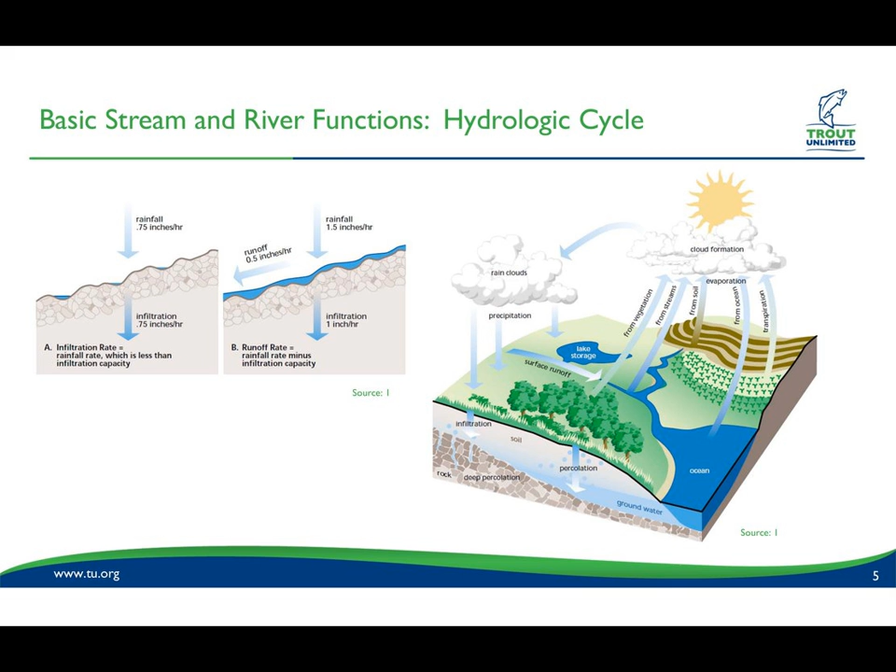The water will be conveyed to our larger lakes and oceans, and then through various forms of evaporation, water vapor will make its way up into the air, form clouds, and given the right conditions, we'll have more precipitation. Regarding infiltration, any water that's infiltrated into the soil will either make its way into the shallow ground and probably replenish shallow groundwater sources or percolate deeper into the deep aquifers.

So streams and rivers have a number of functions and purposes. Basically, they convey water, so the surface water runoff, subsurface flow, and any groundwater that makes its way into a channel. All that water is conveyed through streams and rivers. They also convey sediment and help to facilitate the natural erosion process. They also convey wood, ice, and other matter that's produced within the watershed.

And they also do a good job of processing the organic matter produced in the watershed and breaking it down into soluble and insoluble and particulate forms of nutrients like phosphorus and nitrogen and others. And finally, they provide habitat for aquatic and food for riparian life.

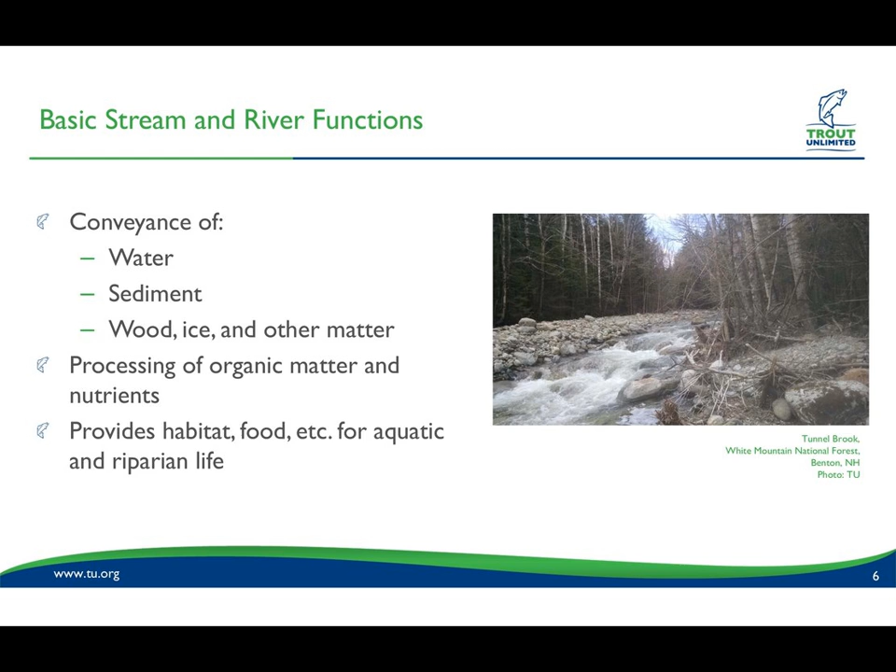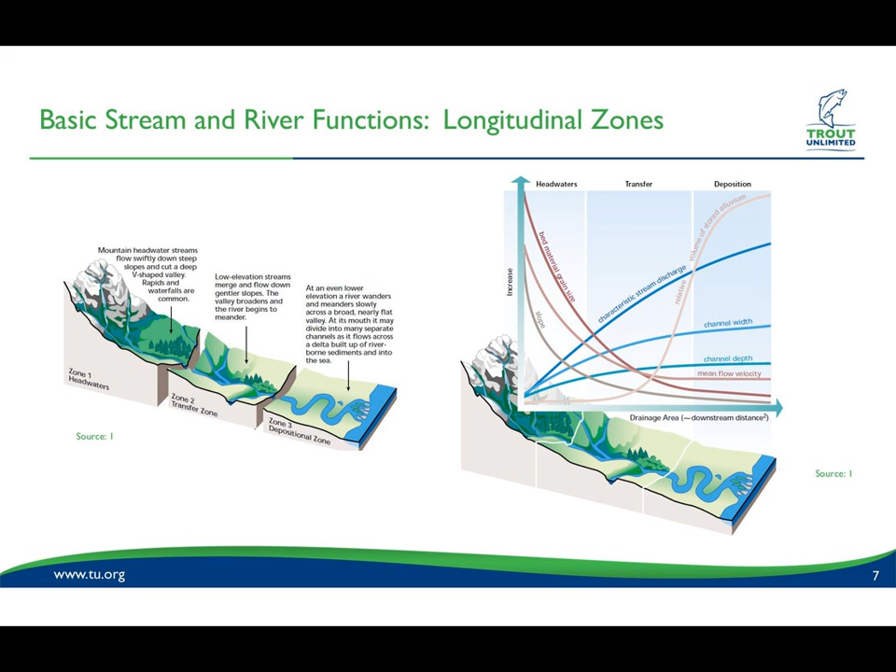Moving on to Zone 2, the transfer zone. This is where the slopes tend to drop off and become more mild. Likewise, the flow velocities tend to drop off and the valleys broaden. And the material that's coming from upstream could be deposited here, but usually is transferred through this zone into Zone 3, where the valleys and the floodplains really open up. The slopes drop considerably, so does velocity, and all that material from Zone 1 just settles out in Zone 3. And because you're at the end of the watershed, your stream discharge is probably at its maximum. Because of that, the channel width and depth increase as well.

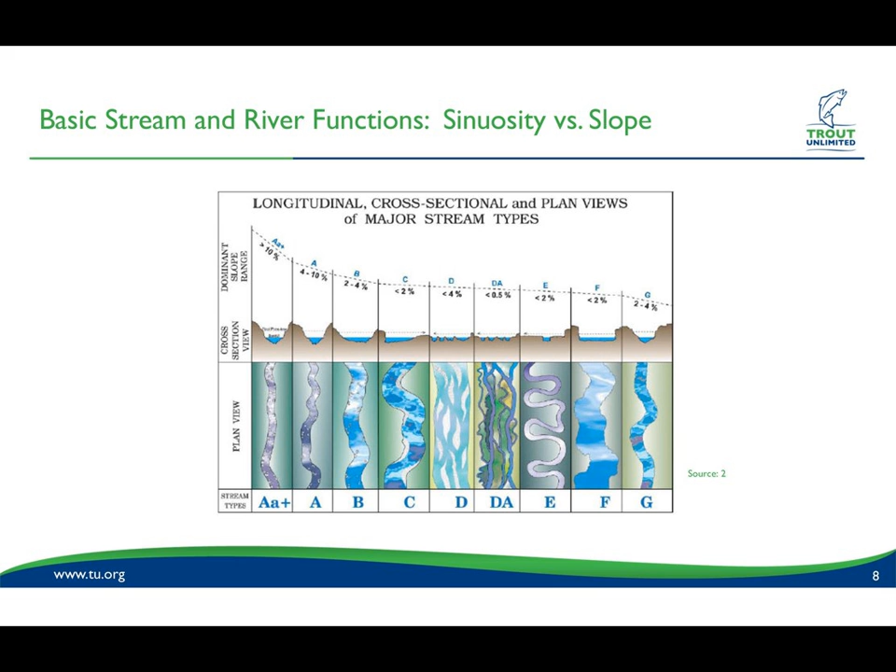Conversely, if you move over to a stream type E, the third in from the right side, you can see that you have slopes less than 2%, and you have much more sinuosity in a channel like that. Just a couple more items on sinuosity. So there's a couple things I want to relay with this slide, and the first one is that especially in Zone 3, streams and rivers rarely stay put. When you have higher sinuosity, you tend to see migration of the meander bends over time, and that migration can happen from upstream to downstream, and it also could occur from river left to river right.

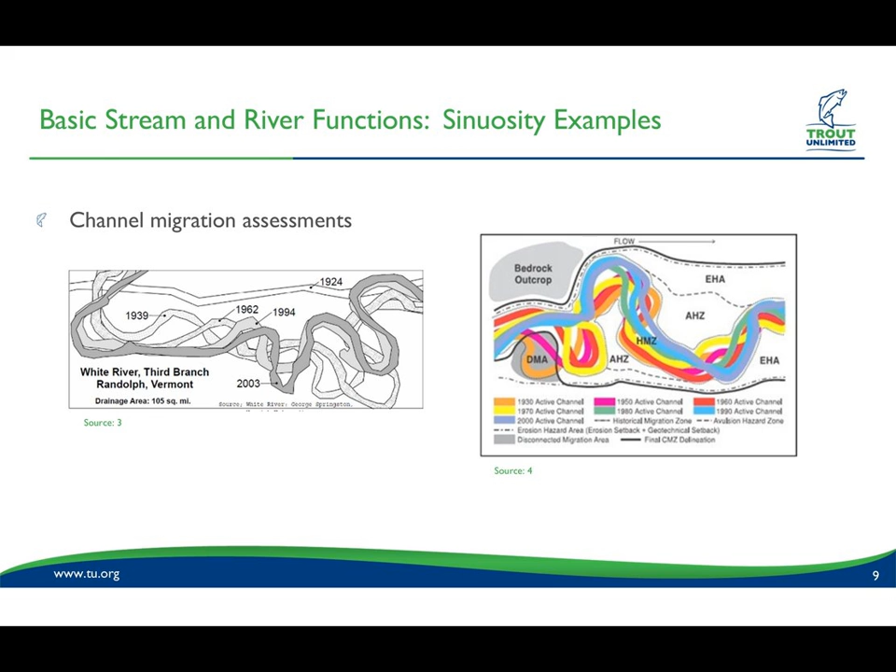is useful not only in planning for any kind of future development, but it could also be useful in assessing infrastructure vulnerability. For instance, and I know this to be the case for a lot of roads and infrastructure, if there's a highway built within the meander beltway and within the river corridor, that road could be subject to erosion if there is migration of meander bends towards the road embankment.

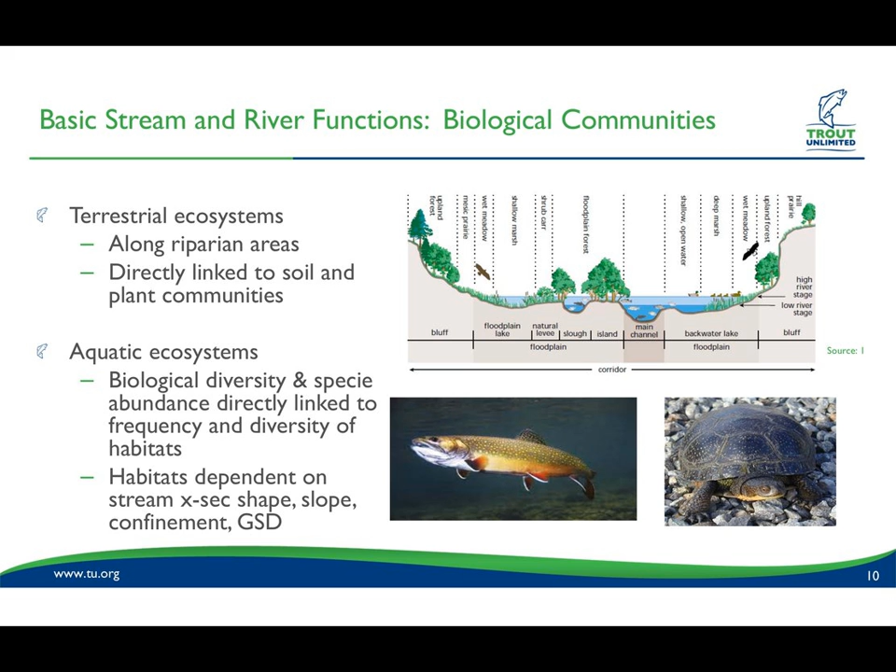But when we talk about biological communities, we talk about two types of ecosystems. One, a terrestrial ecosystem, which exists along the riparian area, and that is directly linked to the types of soils and the types of plant communities. And then we also talk about the aquatic ecosystem within the channel, where the biological diversity and species abundance is directly linked to frequency and diversity of habitat. When we talk about habitats in a river or a stream, we're talking about riffles, pools, and glides. And their existence and extent is dependent on the stream cross-section shape, slope, confinement, and also the grain size distribution of the bed material.

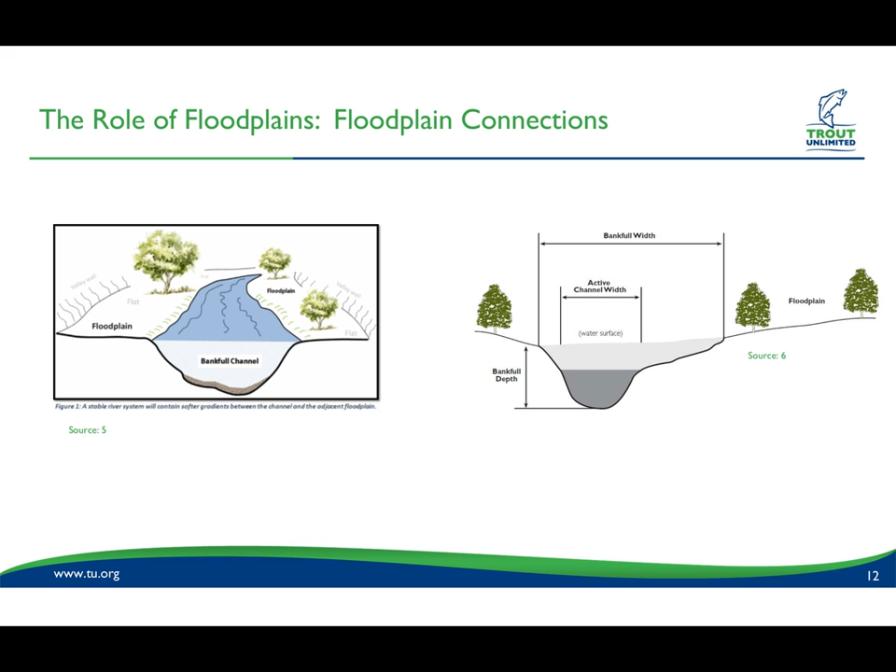So moving on to the role of floodplains and floodplain connections. So here we have two images that do a good job of showing the relationship between channel and floodplain. And this is a positive situation. Both of these show a good connection between the channel and its floodplain. And you can see on the image to the left, the flow is just up to the top of the bank. Any more flow in that channel, the flow would start to go over the top of the bank and then start to engage that floodplain. And that is typical of a channel that is well connected to its floodplain.

I would guess that a 1.5-year storm to 2-year storm would probably go over the top of banks and engage the floodplain. So this is a very healthy system. And one point I'd like to make is that when you have bankfull flow up to the top of bank, that's the point at which you have your highest velocity and highest shear occurring along the bottom of the channel and the banks of the channel.

As soon as you have more flow and the water surface elevation exceeds the top of bank, and you get flow into the floodplain, you get kind of what I call a flow release. You get a reduction in velocity, a reduction in shear stress, and that reduction is one of the benefits that floodplains provide. And I'll show you the opposite case in a couple slides.

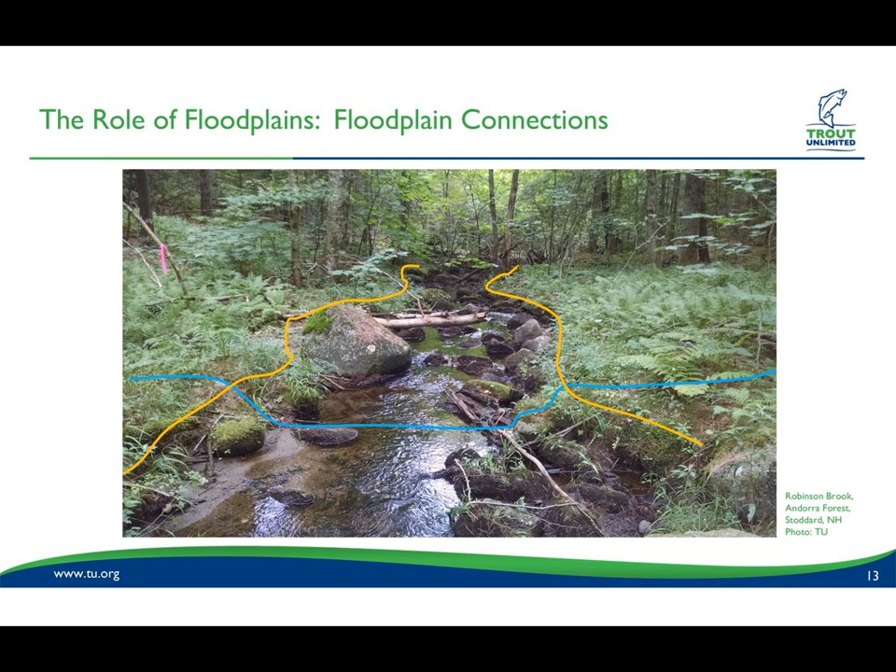We typically see improved water quality being one of the benefits of floodplains. If you have a floodplain that is forested and full of vegetation like grasses and bushes, that vegetation acts as a natural filter to filter out sediment and nutrients.

Once we have that velocity slow down on the floodplain and that water is just basically sitting on the floodplain soils, there's potential for recharging of the aquifers as that water sits there and infiltrates into the soil. And obviously we talked about that they host terrestrial and aquatic ecosystems, and they also provide for a number of recreational opportunities. So here we go.

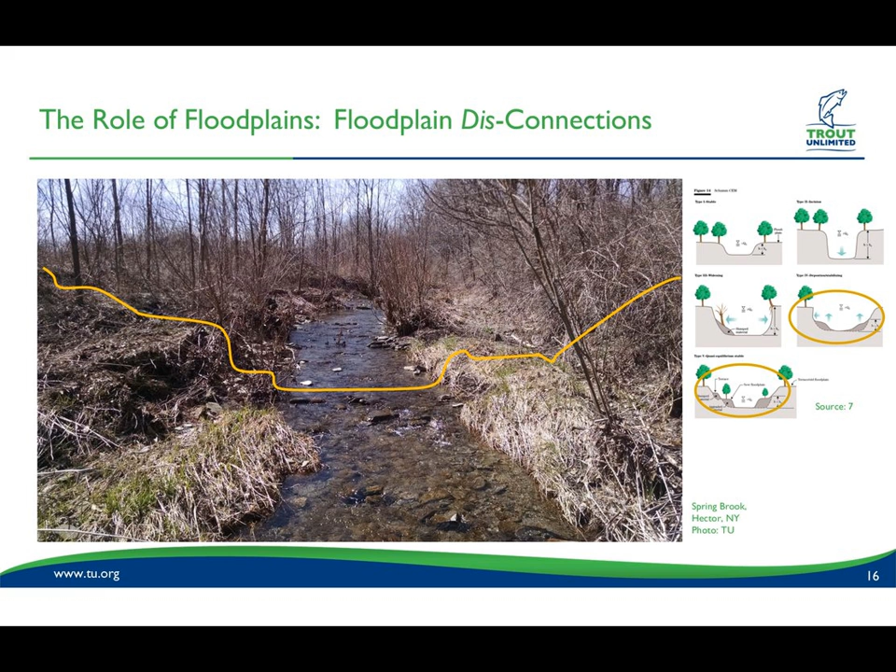And then what we're seeing out in the field is a good example of it progressing through this channel evolution model. Based on our field data and observations, we believe this reach to be in a type 4 or type 5. And you can see from my outline of the surface of the floodplains in the channel, there's evidence of this new kind of inset floodplain that this channel is slowly forming.

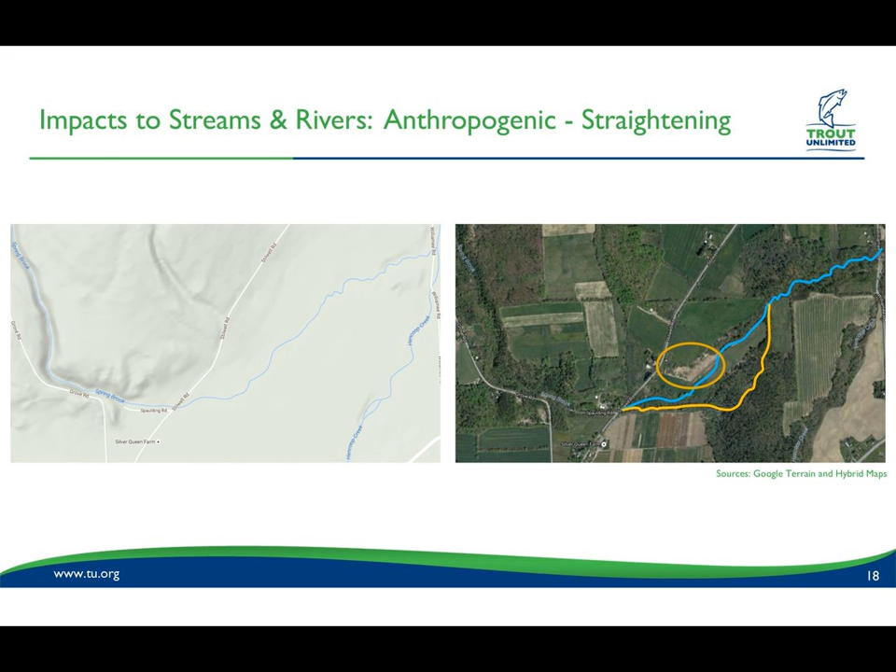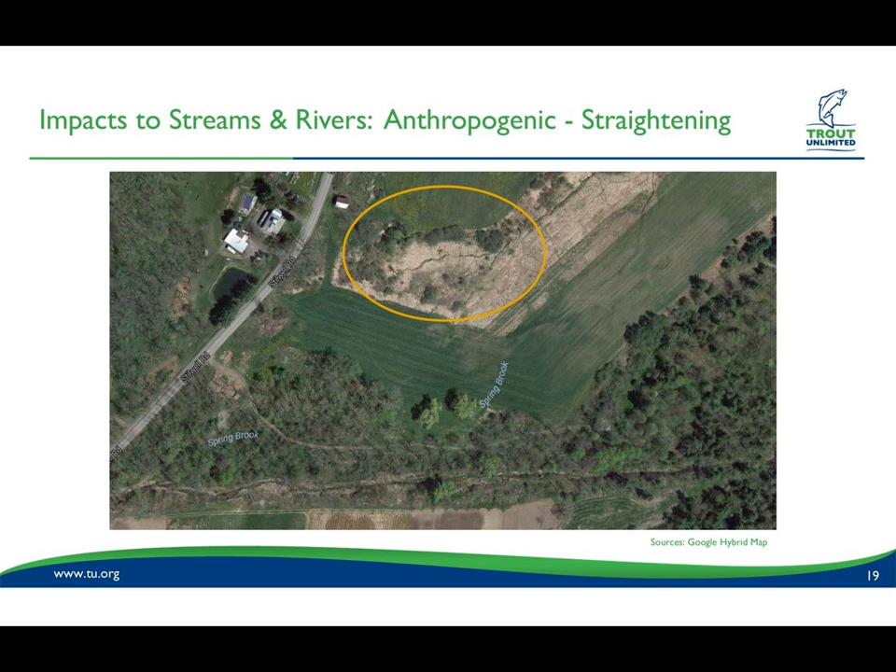What's also interesting is if we zoom into that orange oval that I have on that map, you can see the former channel running through that property. And you can also see the existing channel on the bottom of that image. And if you take a picture of that, this is what it looks like. This is the straightened channel looking downstream. And the impacts are significant.

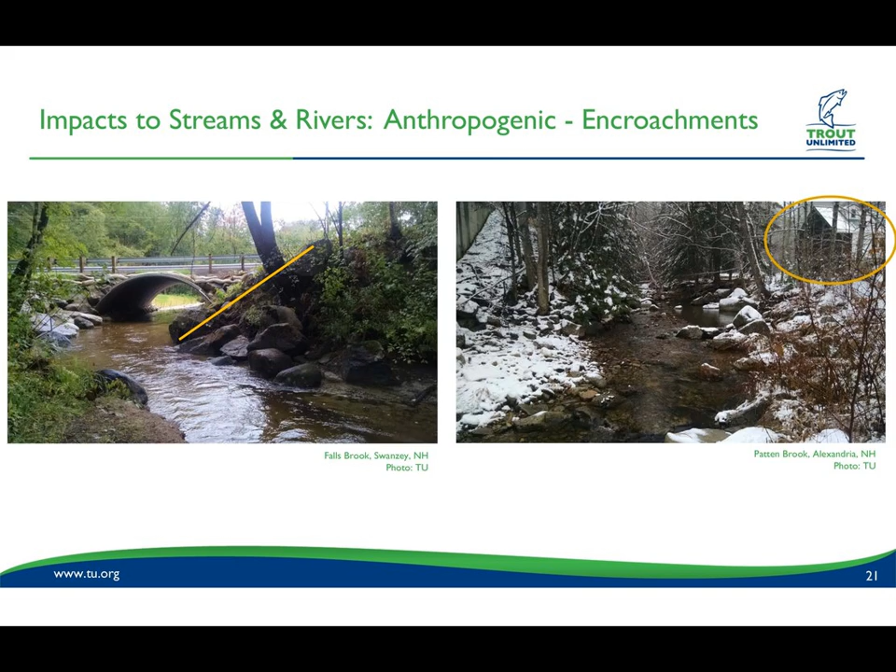And when you send that increase in stormwater runoff to a stream or a river, the stream is just going to adjust. It had a certain cross-sectional area, and it's going to widen or deepen or both, basically adjusting its cross-sectional area for that increase in flow. And that could take 50 years or 100 years to occur, and it could also be a steady source of sediment while that adjustment is occurring.

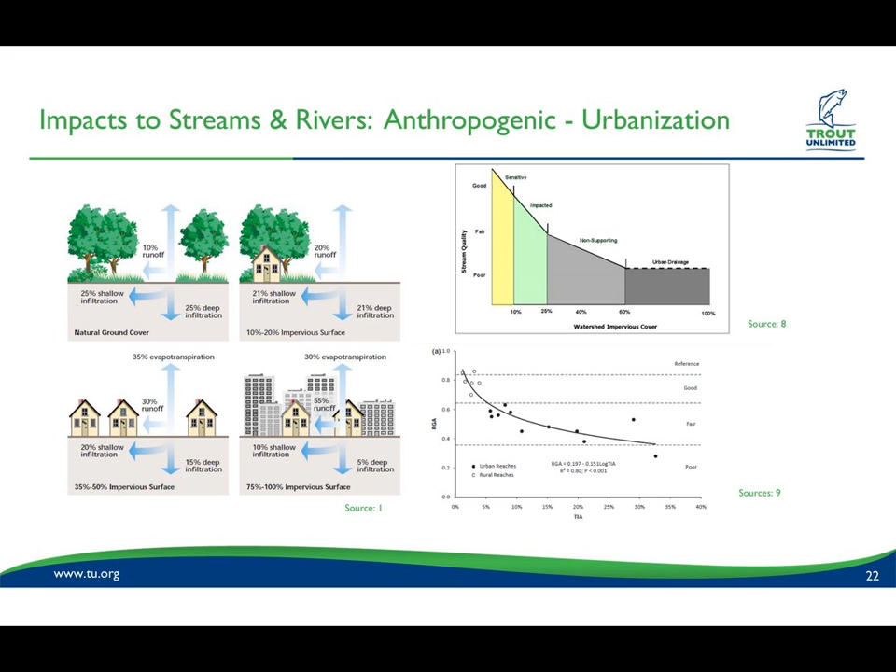And for high gradient reaches, what this graph tells us is that there's a pretty precipitous drop in stream quality as impervious area increases. And to note is that really the inflection of that curve could really be interpreted at 5%. So less than 10%. But either way, anywhere from 5 to 10% could be a point at which the scales start to tip and our streams and rivers are negatively impacted.

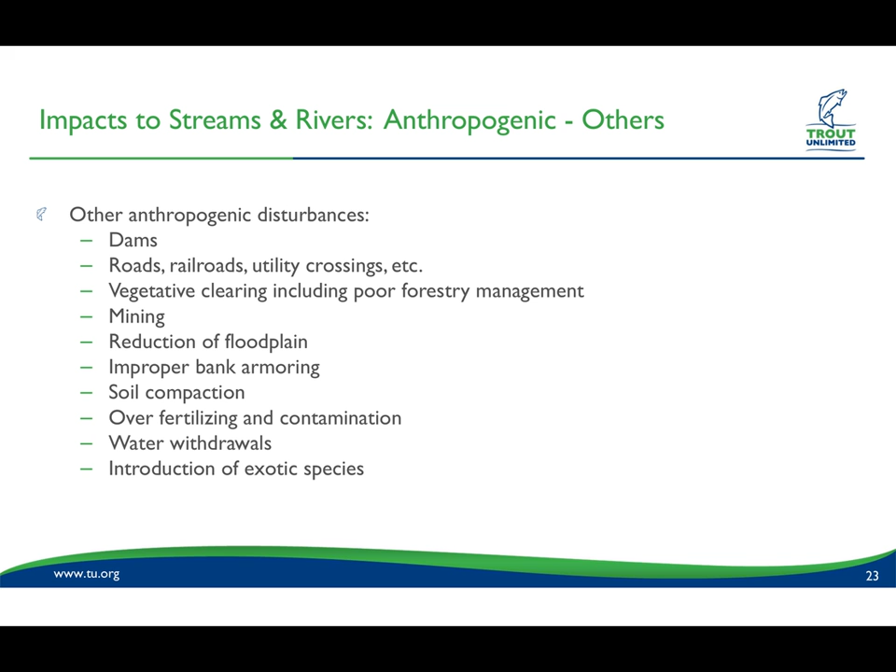We have some other anthropogenic-related impacts to streams that I'm listing here. Obviously, dams are really at the top of the list. Any type of road crossing or railroad crossing or utility crossing is an impact, and we have others that are high impact as well.

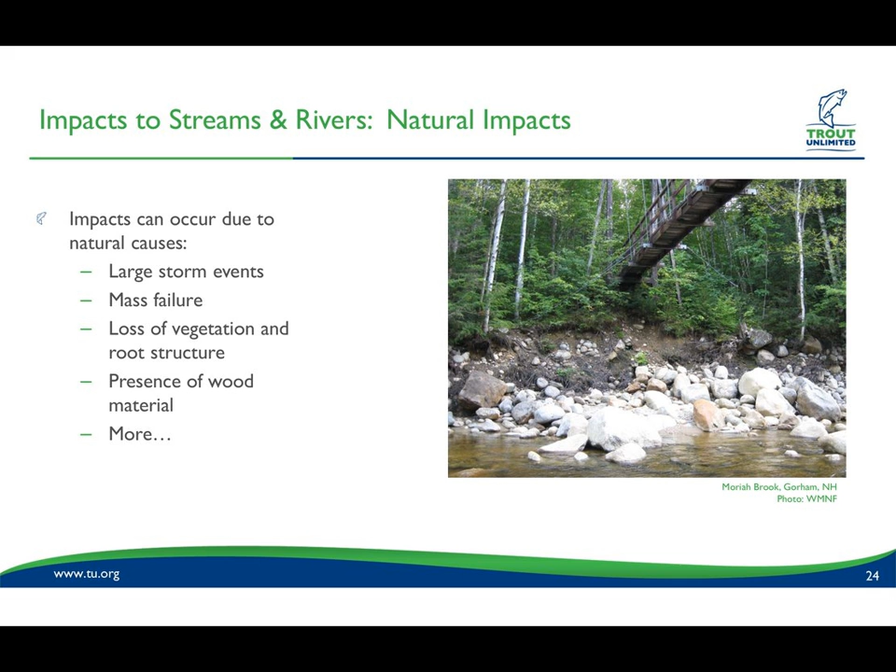There are natural impacts to streams and rivers. A lot of those are related to large storm events, high flow, and high shear stresses. The example that we're looking at to the right is kind of a mass failure along a bank in a pretty large brook in a pretty wild system on the White Mountain National Forest in New Hampshire. I believe this was caused by a large storm event, high flows, high shear forces, and eventually a mass failure along this bank.

So we talked about basic stream and river functions, the importance of floodplains, and then the impacts to streams and rivers from a number of different sources. So let's change gears and focus on infrastructure, and specifically infrastructure vulnerability. So at Trout Unlimited, and I don't mean to speak for them, but I think at U.S. Fish and Wildlife and the Forest Service, I know that we're really into streams and watershed and fish. And I know the question could be from some of you is why the focus on infrastructure and flood resiliency? Why are we focused on that?

Well, one thing that we know and what we've discussed over the last few minutes is that infrastructure often impacts rivers and streams. It has in the past, and it's happening right now. But the opposite occurs too. Rivers and streams impact infrastructure. I think maybe half of us on the call and who will be at the workshop will be very interested in the rivers portion, and maybe the other half might be interested in the infrastructure.

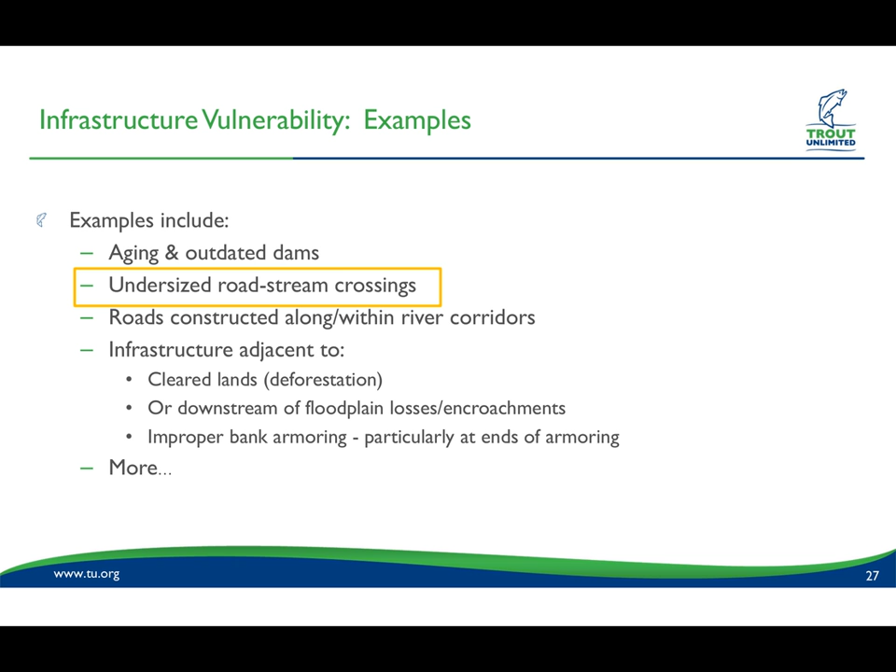Roads constructed along or within river corridors. I tried to touch on that previously. That's another one that's worth a look for the planners out there and anyone within a town that wants to assess those types of vulnerabilities. And then infrastructure adjacent to cleared lands or deforested lands, adjacent to or downstream of floodplain losses or encroachments, and improper bank armoring, and the list goes on.

So we don't have the time to go over more than one example, unfortunately, at least for this. We'll try to touch on other examples in the workshop. But for the remainder of this presentation, we're going to focus on undersized road stream crossings.

And so let's just imagine that this undersized culvert is at the bottom of a large watershed. The 100-year storm event has just occurred or is in the process of occurring, and there's a large volume of water heading down the mountain towards this undersized culvert. In its path, it's stirring up sediment, gravels, cobbles, maybe some boulders.

The majority of that material is entrained in the water column, and there's enough energy to keep that material in the water column. As that water moves down and feels the influence of that undersized culvert, all of a sudden that mass of water slows down. As it slows down, it gets backed up, and the water surface elevation starts to rise, or there's basically flooding behind this pipe.

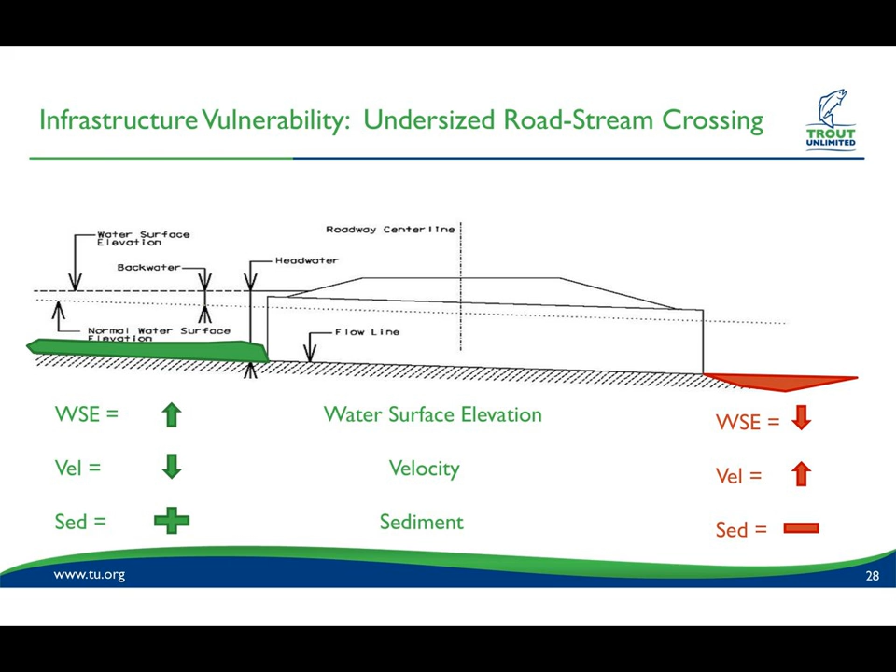Downstream, we usually have the opposite case. We usually have water surface elevations that are relatively lower compared to upstream. Because of the pressure upstream, we have a fire hose effect on the downstream end with really high velocities coming out of that pipe. And because of that, we have sediment erosion. And it's not just along the bed. In a lot of cases, it's around the entire pipe.

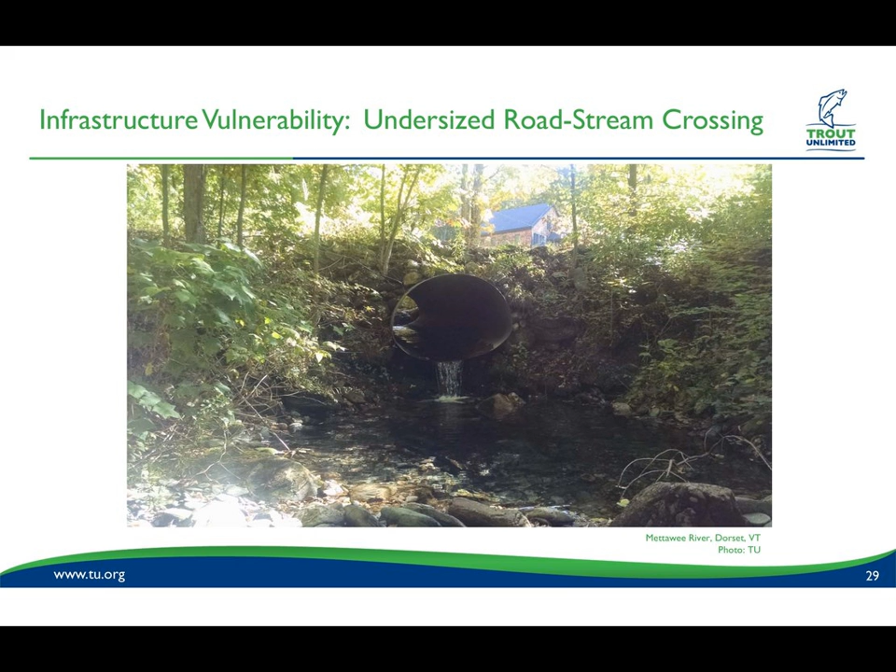So what we do in these situations, and what we and others in New Hampshire, Vermont, Maine, Massachusetts do, is culvert assessments. And I'm sure these are being done in Pennsylvania, New York, and New Jersey as well. But I'm going to walk you through a culvert assessment. This is one of our projects that I'll share.

And these crossings, there was information collected on these crossings, and they were assessed for geomorphic compatibility, aquatic organism passage, otherwise known as AOP, and then hydraulic capacity. So one of the first steps when we do one of these is we start in the office. We open up GIS and we bring in all the road layers, we bring in all the stream layers, and wherever those intersect, we assume that there's a road stream crossing.

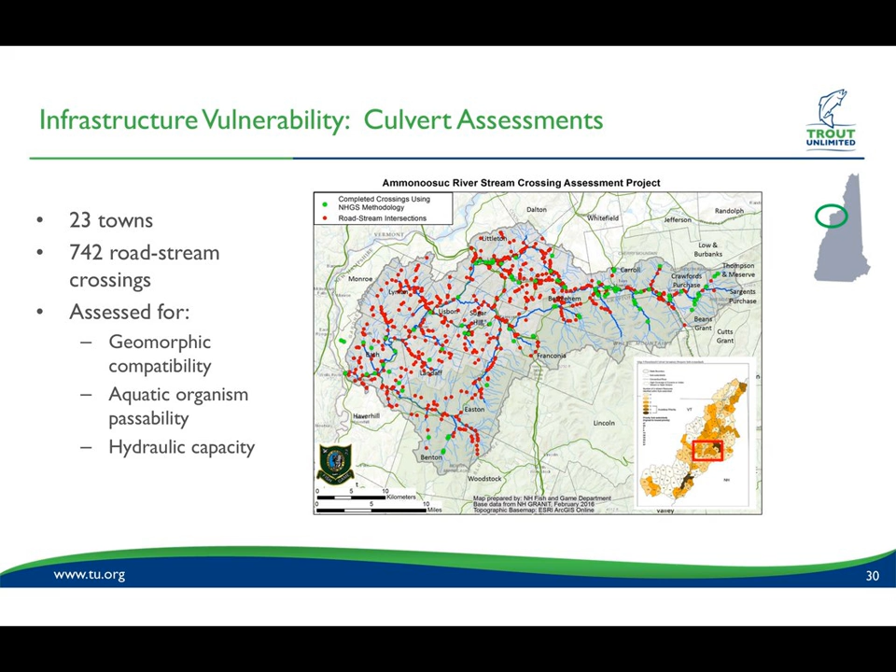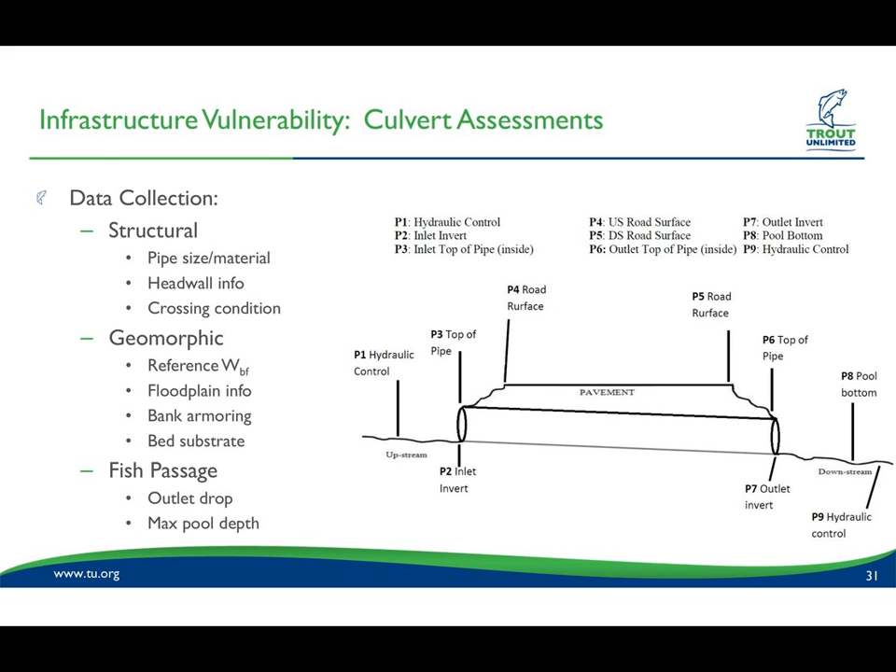So in terms of data that we collect, and this is just some of the data, but we collect structural data, geomorphic data, and then fish passage data to support the three different assessments that we go through. And we also collect survey data shown in the image to the right. And then we run that data through the aquatic organism passage and geomorphic compatibility models, and we get various results.

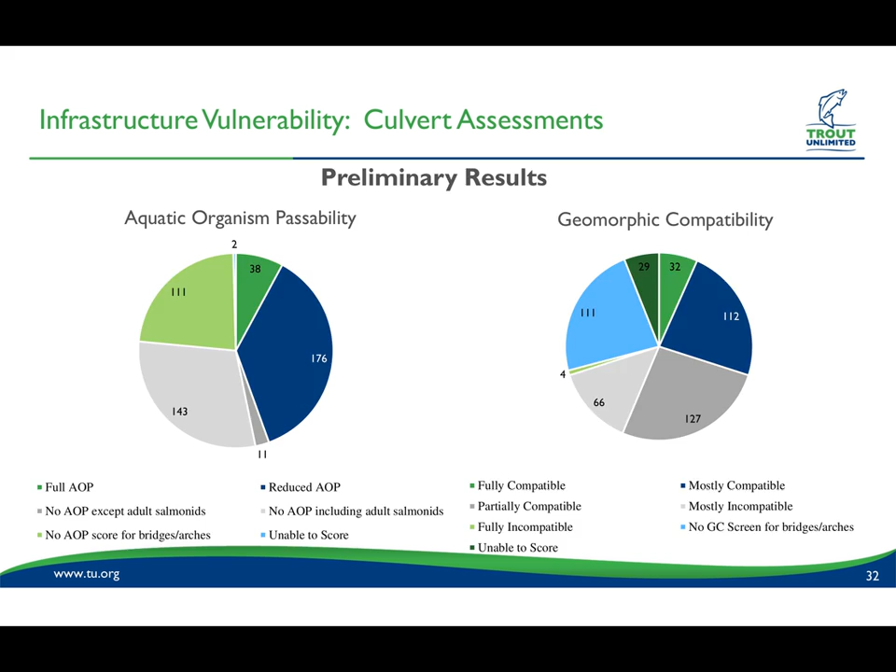For geomorphic compatibility to the right, again, we go through the full gamut here: fully compatible, partially compatible, and then incompatible or unable to score. So those are the basic models that existed, and we went ahead and created this culvert hydraulic assessment model. As you would think, this effort includes collection of a good amount of hydrology data. Basically, you have to collect hydrology data for each culvert, right? And that's primarily a GIS-based effort.

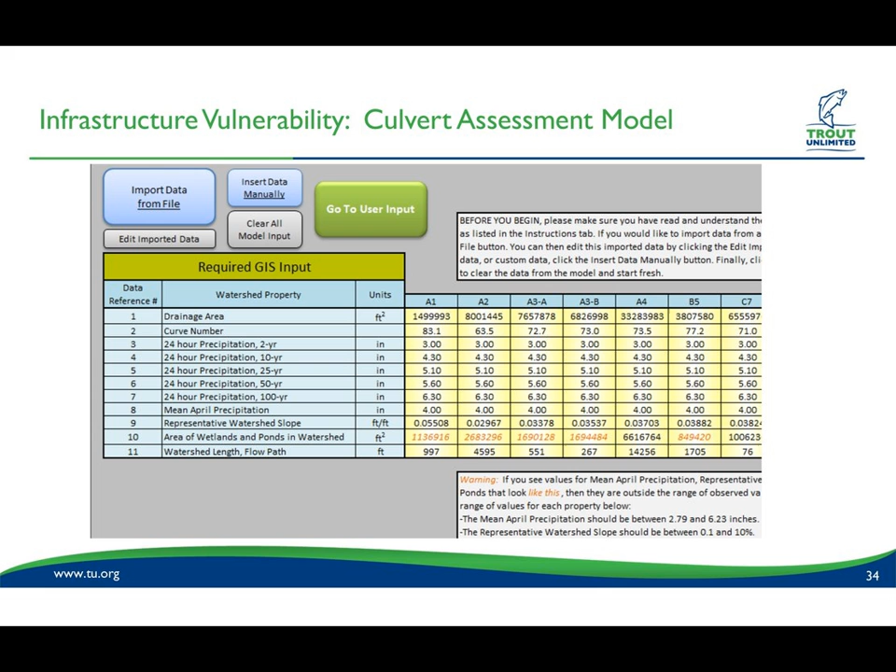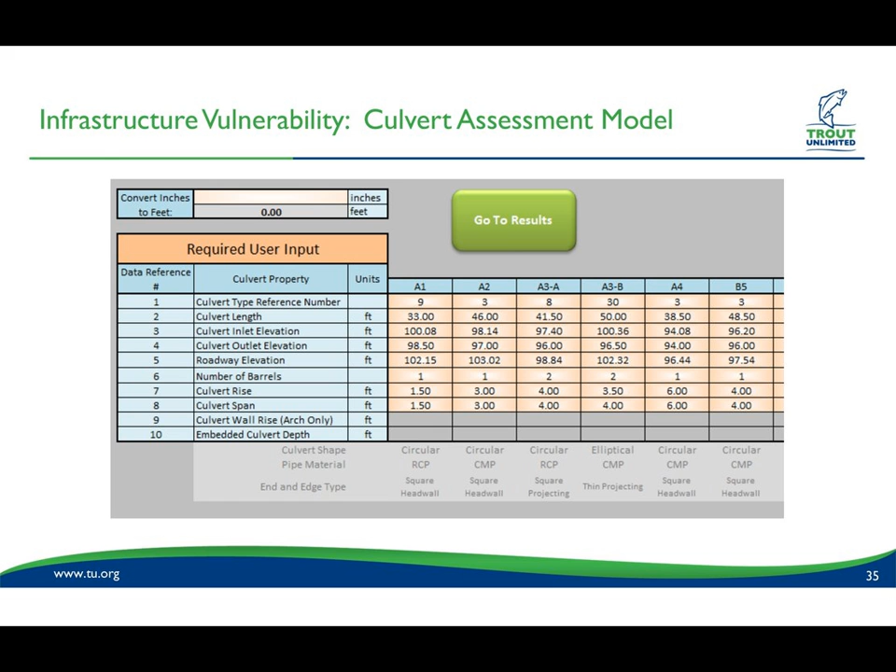We move on to the tab where you input the hydraulic data. Again, you have certain culvert properties. You have a reference number, a length, an inlet and outlet elevation, roadway elevation, a rise, a span, again, for all the different types of culverts. And once you have that information input in, then you go to the Results tab. If this was live, I would go ahead and select the return period. Here we have a 100-year return period.

And in the first section, looking at the text that's at a 90-degree angle, existing crossing properties. So you have all the existing properties for each culvert ID. Again, those are listed as LP_BOBK_02, and so on. And you can see that there are cells shaded red, green, or yellow. And those are the results, basically telling you, was this culvert able to pass the 100-year storm event, or was it not? So the basic way that this model is set up is that it uses what's called the headwater to depth ratio to assess whether it passes, is transitional, or fails.

So the headwater is basically the depth of water just upstream of the culvert, and the depth is the height of the culvert pipe. So if the height of the water upstream of the pipe was 0.8 feet and the culvert pipe was 1 foot high, you would have a headwater to depth ratio of 0.8. And the way we set up the pass or fail in this model was that if it had a headwater depth ratio greater than 0.8, it failed. If it was between 0.8 and 0.65, it was transitional, and if it was under 0.65, it passed. So that's how we set up the pass-fail mechanisms.

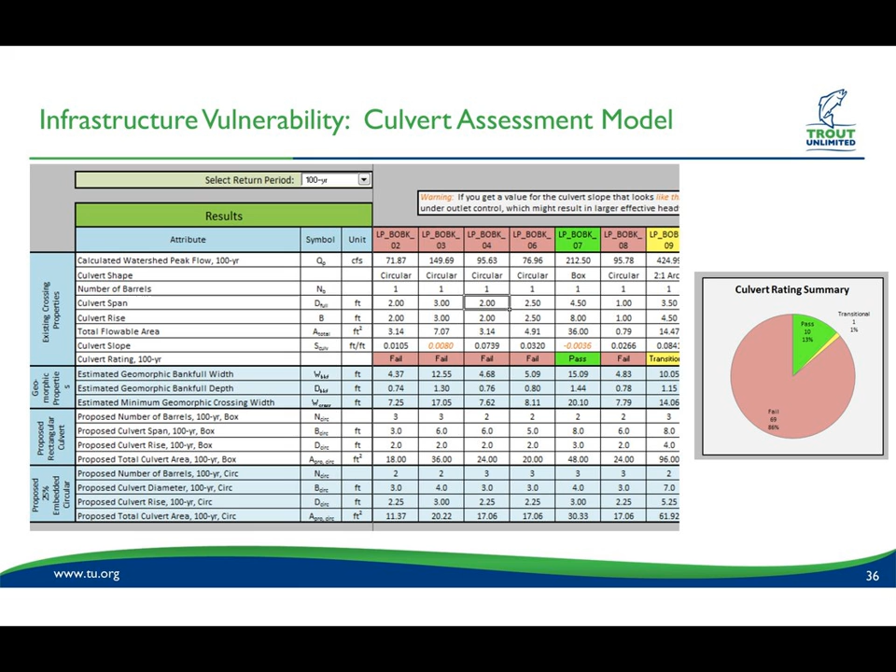What we should also say is that in order to generate the hydrology, embedded in this model are the USGS StreamStats regression equations. We use those equations to generate flows for certain size watersheds. Anything that was under a certain size, we just used the NRCS method of developing peak flow. So there are some details in here that provide more explanation, but I think we'll leave it at that for the purposes of this webinar. We're going to touch on this more in the workshop.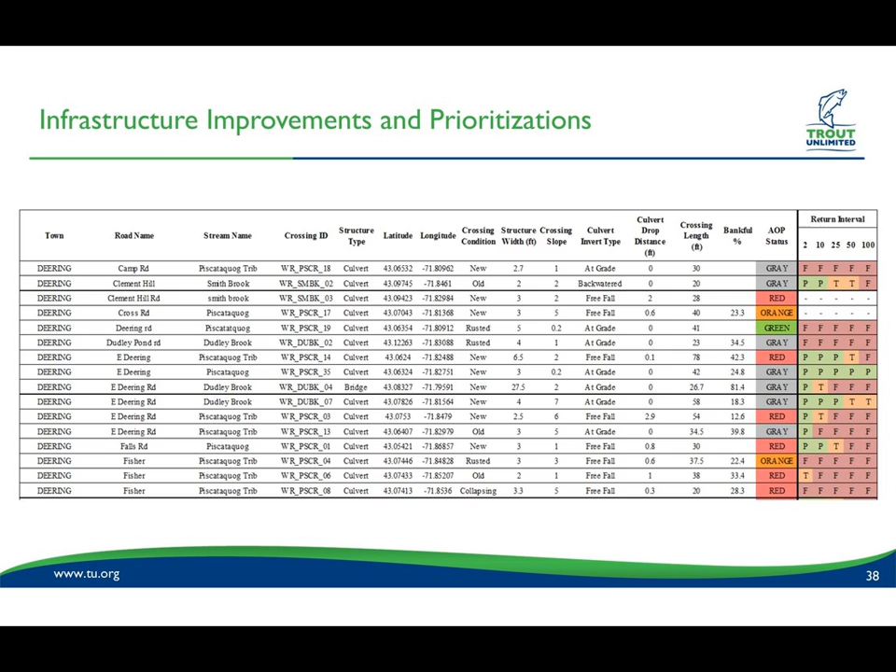And this, along with maps, and I'm going to zoom in here, are a tool that the towns could use to say, okay, how do I prioritize the replacement of these culverts? So again, using the table we just showed and then these maps, which I personally think are more useful, they could say, okay, well, this culvert is on the road that leads to the police station or to the hospital, and it doesn't pass for the 10, the 25, the 50, or the 100.

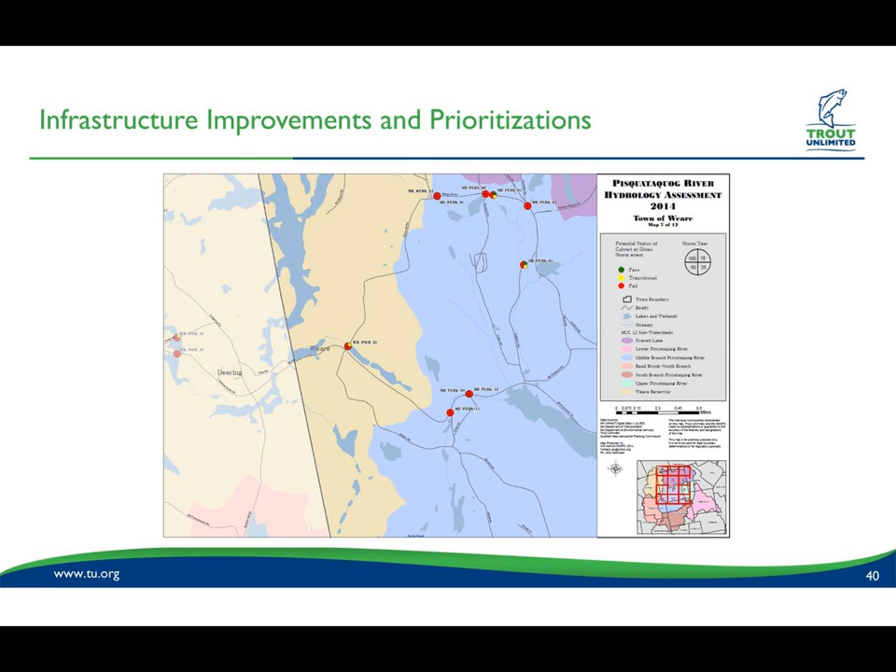So let's put that one at the top of our replacement list, whereas other ones that might be lined up with some kind of development that doesn't have near as much priority might be on the bottom of the list. So we're going to stop it there. I'm running out of time. We are going to touch on that in more detail in the workshop.